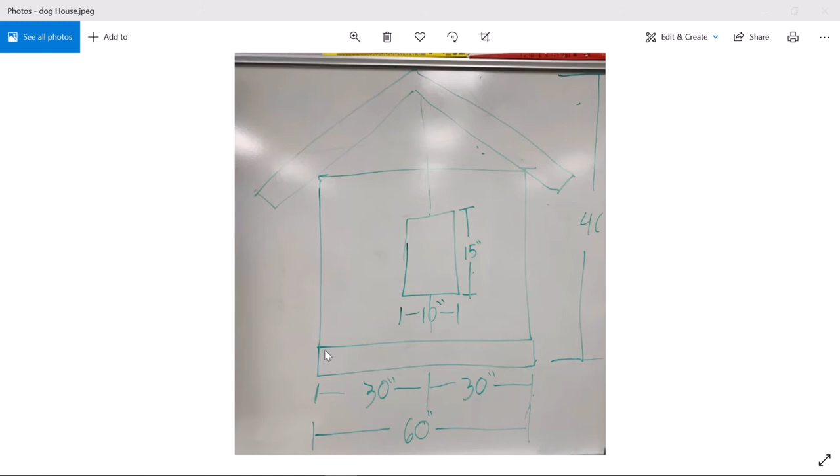It's time to make the floor for our doghouse. We're going to build from the bottom up, like you traditionally would. It's called platform framing - you build a platform, then build on top of that. In our floor system, we need a rim joist for our floor joist to attach into. Our floor joist attaches to the rim joist, and then our subfloor, the OSB sheeting, goes on top of that. So let's get started.

Okay, so the dimensions on our doghouse are 5 feet by 2 feet 6 inches, which is 30 inches. So we need to draw a rectangle. I'm going to hold in shift and pan a little bit, click in my scroll wheel or middle mouse button, and rotate till I get a look. I'm looking down right here.

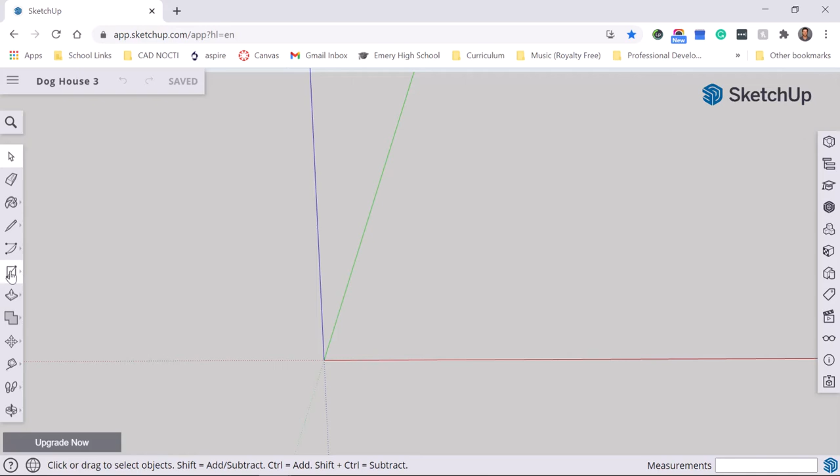Then I'm going to come to the left and choose my rectangle tool. I'm going to click on the origin and just click and let go. If you hold in your clicker, when you let go it's going to automatically make it that size - you don't want to do that. You want to click and let go like that, and then make it the right dimension.

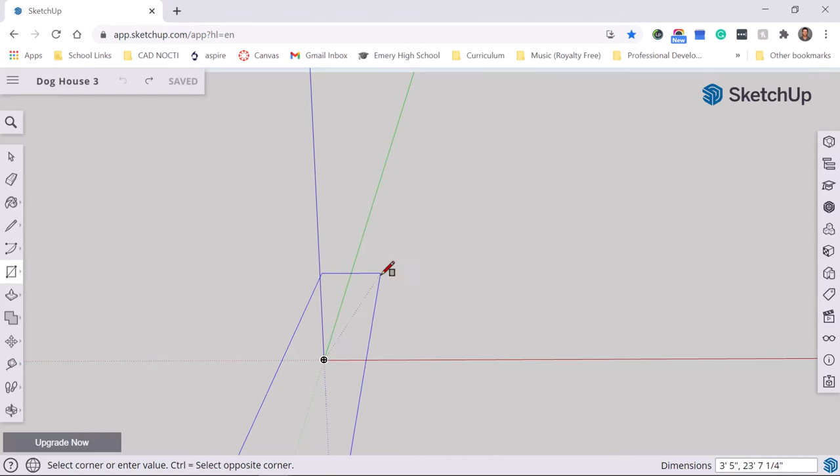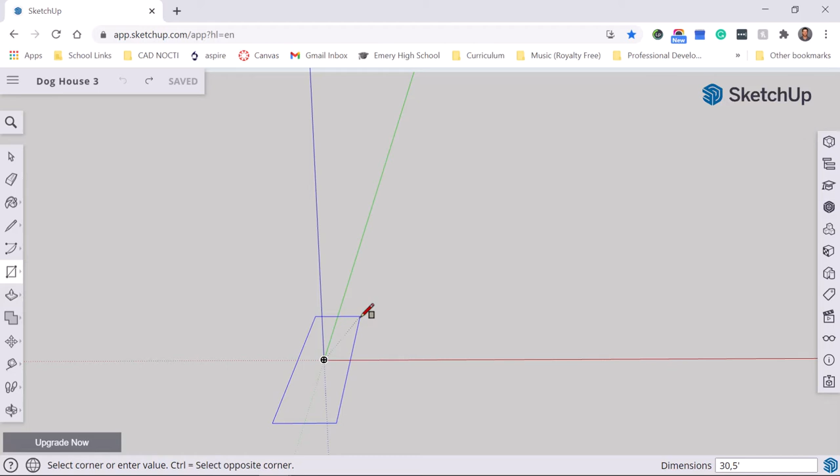So in the bottom right, if you look, it shows our dimension. Right now it's 2 feet by about 9 feet, and we want it to be 2 feet 6 inches, which is 30 inches. So if I type in 30, comma, 5 feet - you could do 5 and the foot symbol, which is just left of enter, or you could just do it in inches. I'm just going to do 5 feet. Enter. Now we have our 3 foot by 5 foot base that we're going to use later.

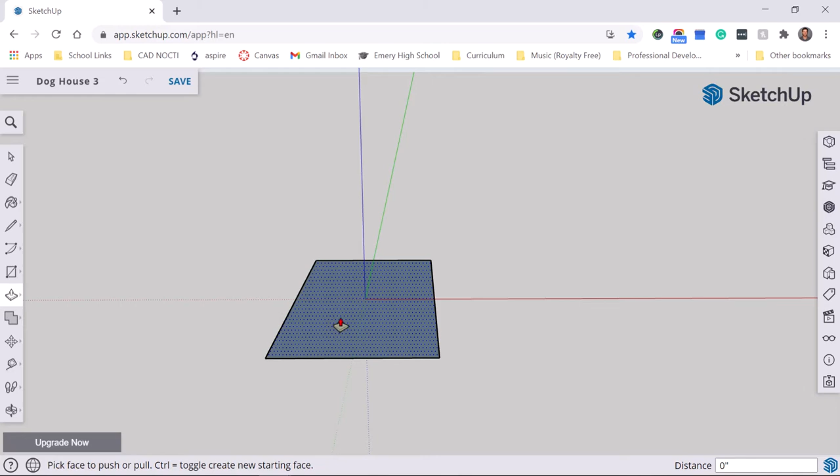So let's go ahead and extrude this. Use the push-pull tool, click and let go, drag up in the direction you want it to go. Our plywood is going to be 1/2 inch. Typically you'd do 3/4 inch tongue and groove for a floor, but since this is for a doghouse, we're just going to go 1/2 inch, so 0.5, or you could type in 1/2. Either of those would work.

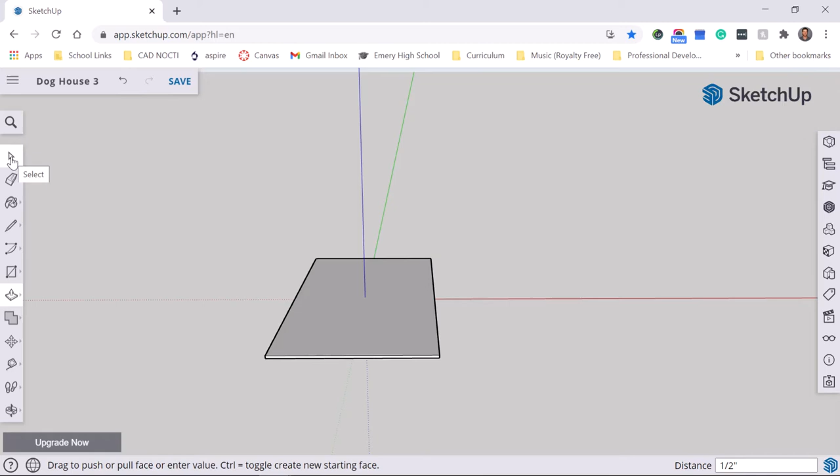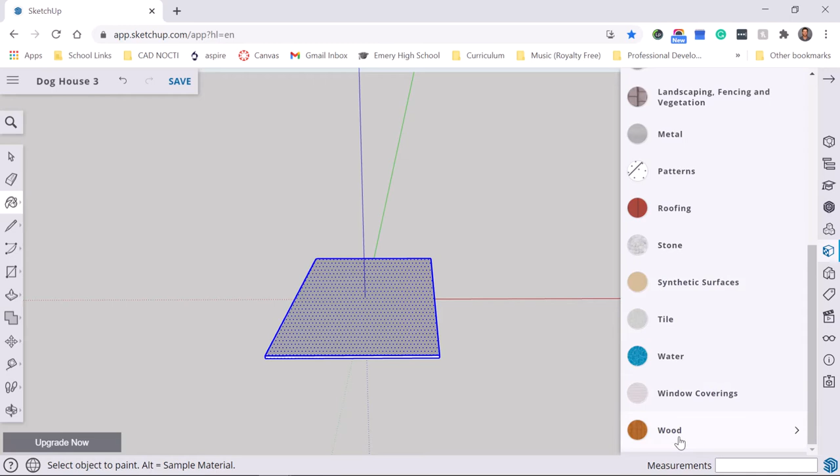So it looks good, but it doesn't look like wood or sheeting, so we need to fix that. Go up to the top left to your select tool, click and hold and drag a box so you select the entire thing, and then go to your paint bucket tool. On the right you're going to get some options. Click here on the browse - we want it to be wood, so it's alphabetical, go all the way down to wood. The bottom left is your OSB, oriented strand board. Click on that, paint it.

Okay, I'm going to go back to the select tool. I'm just going to click over here, hide this for a second, and click and drag a box over this. Now we need to make this a component - we need to combine all the entities in here. We need to combine the paint, our lines, our extrusion, everything into one solid board.

So I'm going to right click, say make a component, and we could just say OSB flooring - well, this is our subfloor, so OSB subfloor. And you could put the dimensions too, you could say it's a 3 foot by 5 foot OSB subfloor. Typically the more descriptive you are, the better, so that you don't go back and try to find it and forget what it was.

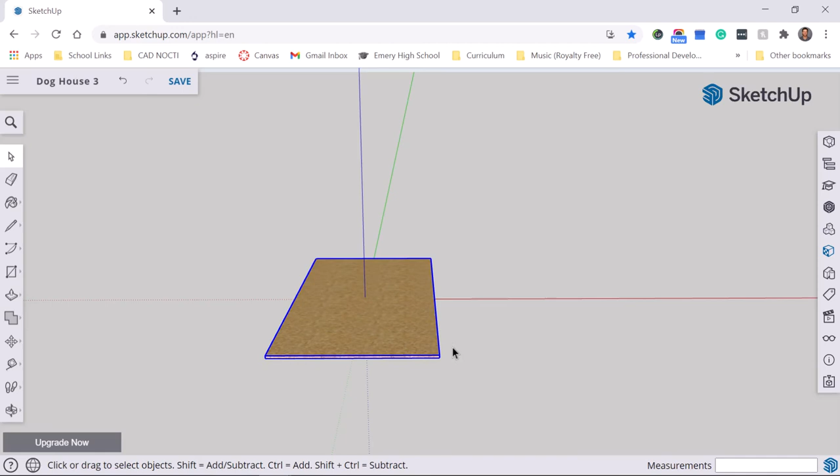Okay, there's our subfloor. You can move it by clicking on the move tool, kind of move it out of the way. Now we need to make our other components. So we made the subfloor, we need to make our rim joist and our floor joist.

So click on the rectangle tool, we're going to make a board. Click on the origin and go up the blue axis, and then kind of out to the right. I'm going to hold in shift, pan, and then rotate by clicking in the scroll wheel. I want to look down the board like this, making sure I'm going up the blue axis and then out this direction.

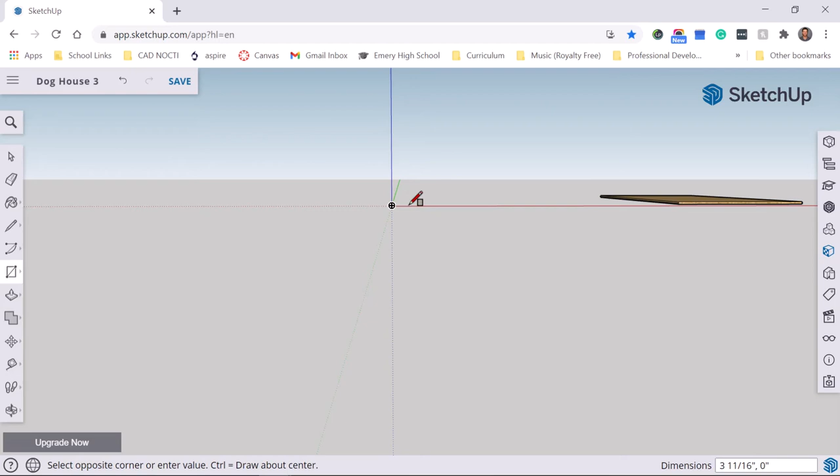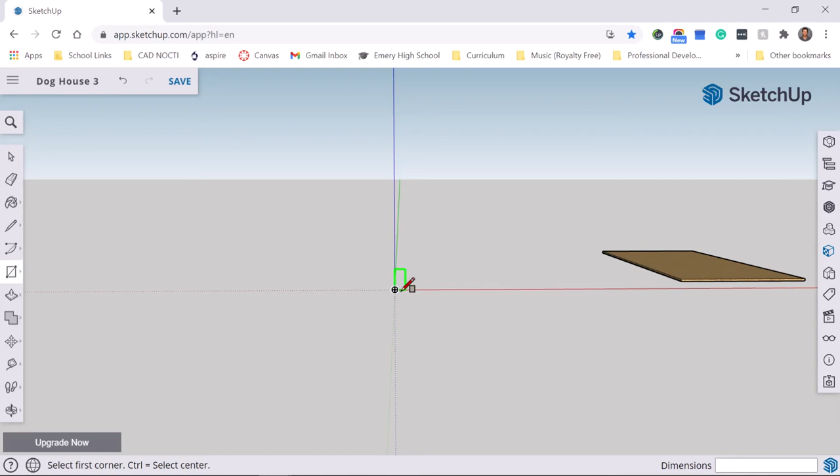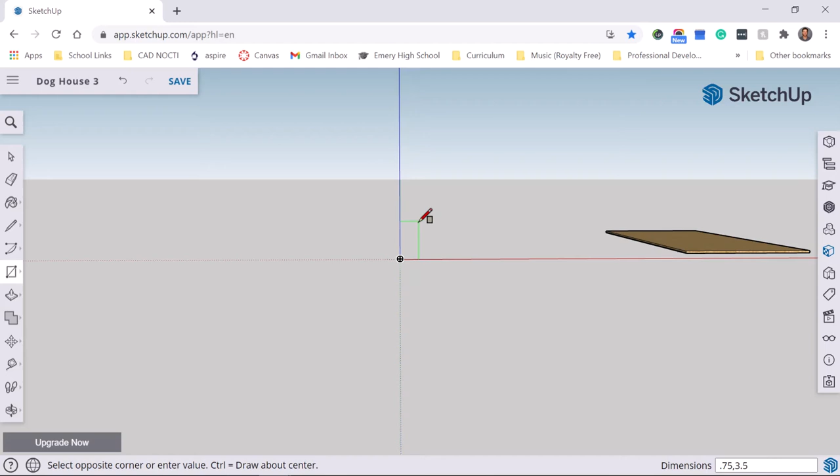Alright, so this board, we want it to be - well, actually let's do it this way. No, this way would be good. Okay, so look at it from this side. Click, go up the blue, out the red. And we want this board to be a 1x4. So a 1x4 is actually not a true 1x4 - it's 0.75, so 3/4 of an inch, comma, 3.5. Enter. That's what a 1x4 truly is.

Now we want to push-pull that. And this one is going to be 5 feet, so type 5, the foot symbol which is left of enter, and do enter.

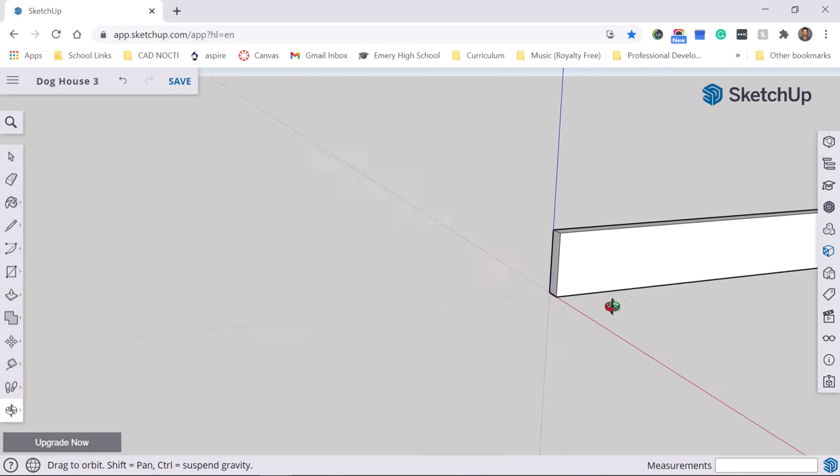Okay, I'm going to click on my scroll wheel and rotate. Now I'm going to select the whole board. Go to the paint bucket. So I clicked on the select tool, drag a box over it. Paint. This one we want to be a wood grain board.

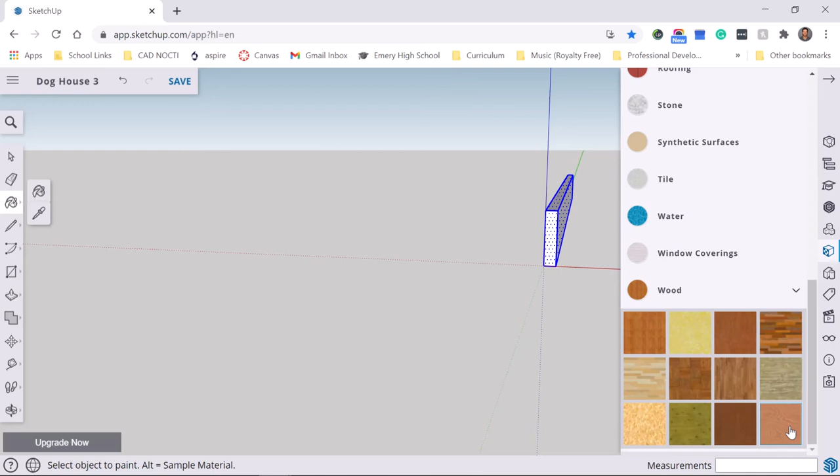They don't have pine on here, so we're just going to click on this one. It looks like a cherry. Close enough. Looks like a wood board.

Now you can right click on it, say make a component, and it's a 1x4 by 5 feet. And we could say this is our rim joist.

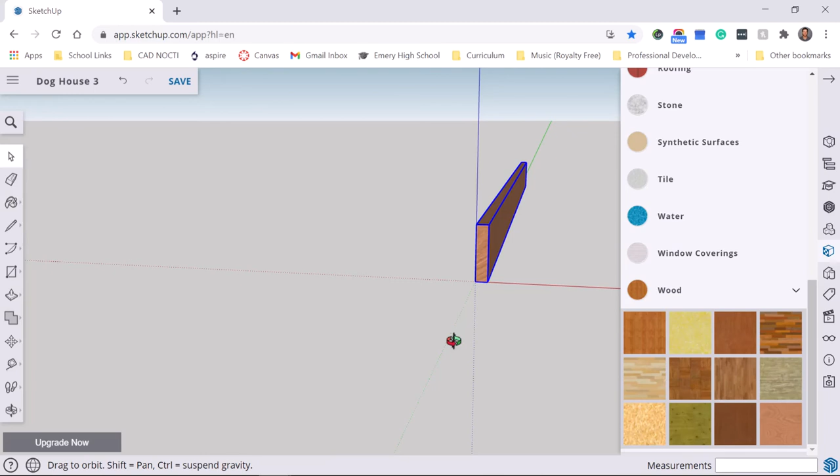The nice thing about this is after you've made one, you can just duplicate it. So I'm going to right click. There's a copy option up here. Right click on it again, and then there's a paste. And I don't know why this menu stays up, but you can move it out of the way.

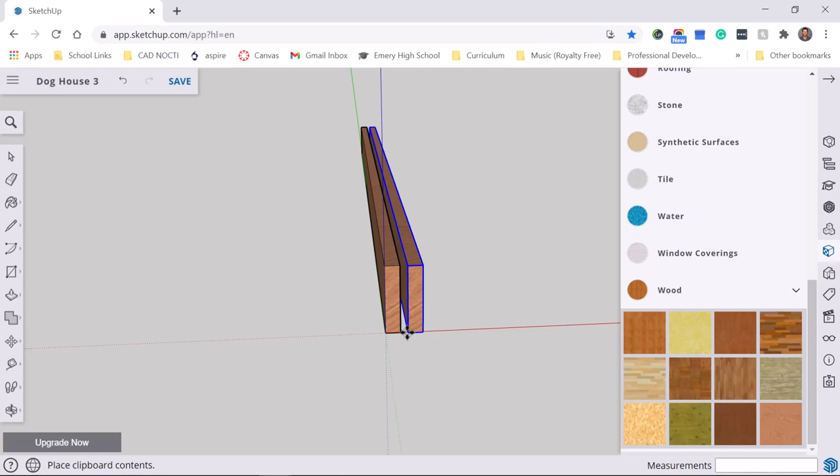Okay, I'm going to first click where I want it to start, right here. Well, I actually just pasted it there. So now if we want to, we can move it. So go to the move tool, click right here on the origin and move out.

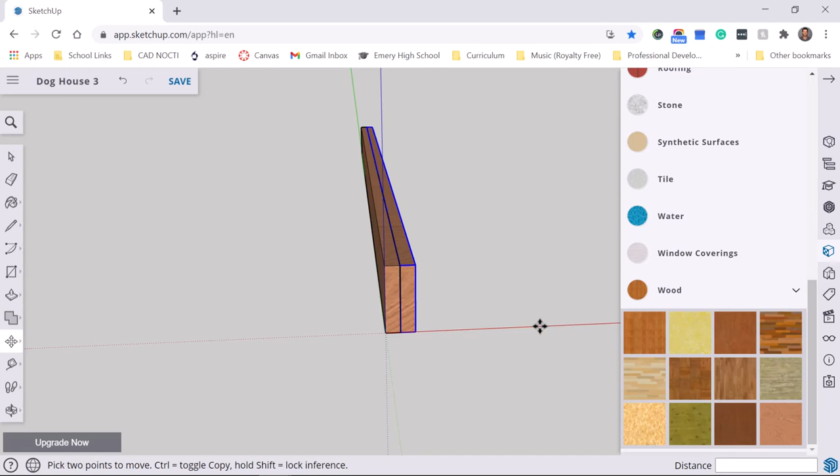And we want it to be 2 feet 6 inches from end to end. So actually, let's do something else. I just hit escape. Let's make us a little marker to shoot for.

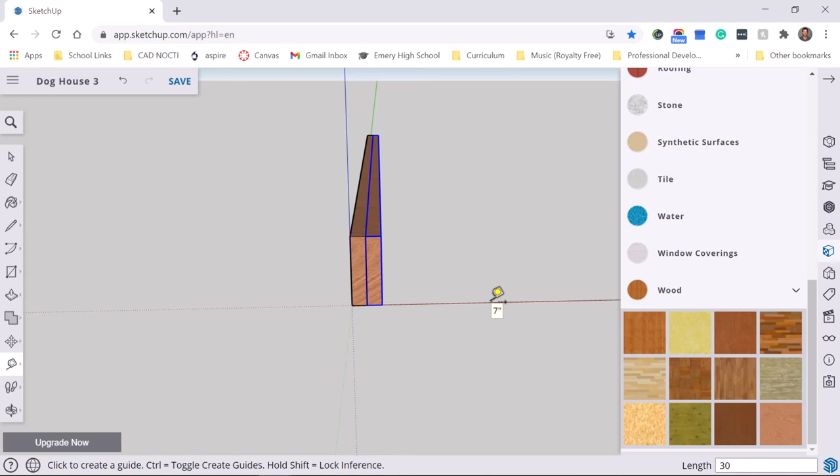So over here on the left, there's a tape measure. Click on the tape measure. Click on the left edge of this board and drag to the right and type 30. Enter. What that did is it gave us a little point out here of 30 inches because we want this to be 30 inches wide.

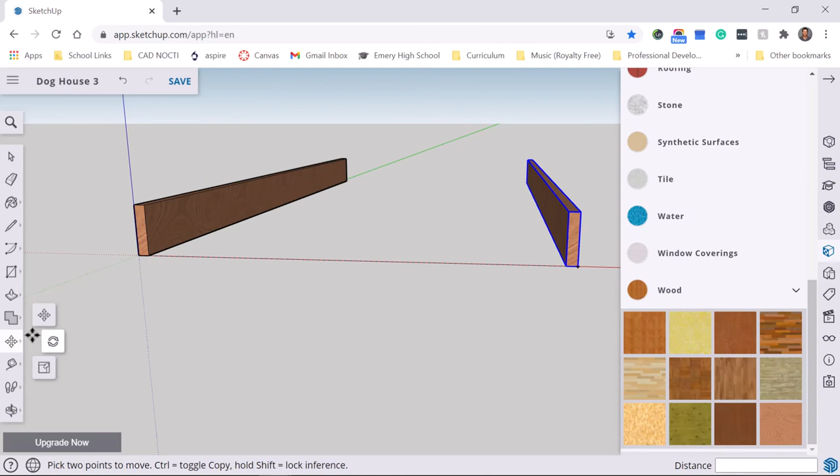So now what I can do is I can click on the move tool and I can click on the far right corner here. I can bring it over and I can actually snap it to that. So now if I were to measure this from outside or endpoint to endpoint is 2 feet 6 inches or 30 inches.

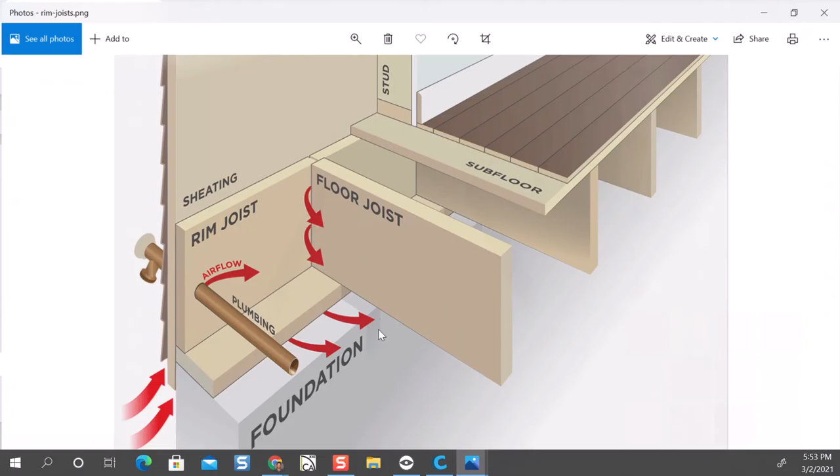Okay, so we're almost there. Now all we need to do is add in a couple more boards, which are going to be our floor joists. So we just made our rim joist. Now we just need to make our floor joist.

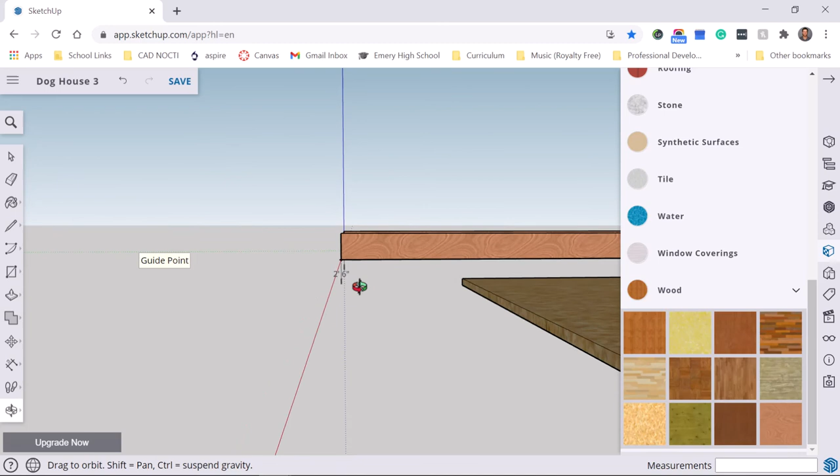So I like to draw them in the way they're going to extrude. So I want to extrude it out that way. So I'm going to look at it from this direction. I'm going to zoom in a little bit right here.

And then I'm going to do the rectangle tool. I'm going to hover over this endpoint. I'm going to go out to the right. And I'm going to click. That way I know it's lined up with that.

So once again, I'll do that again. If you hover over this and go to the left, you'll see a little green dotted line. That tells me that that is in line with that. So I'm going to click and let go and just drag up like that.

And this is a board that is 3.5, comma, 0.75.

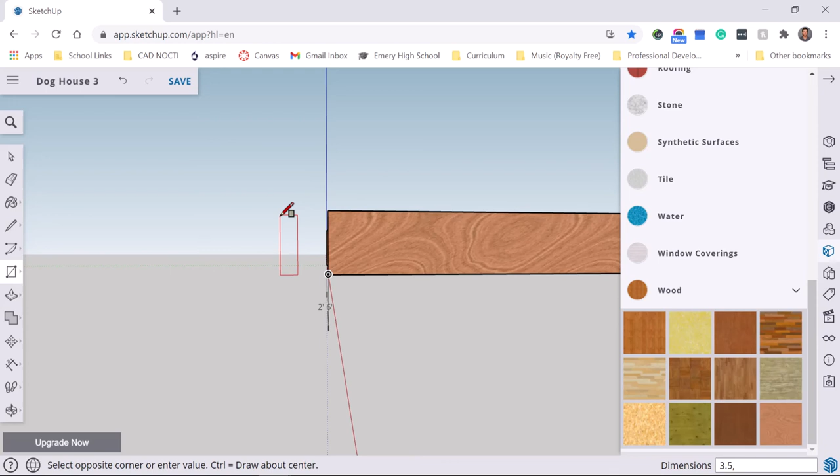And now I can extrude it in that direction. So to figure out the length that this board needs to be, we can either just take this measurement from inside to inside, or we can do some math. So you can do 30 inches minus 0.75 plus 0.75. So what's 3/4 plus 3/4?

Okay, so that's 1.5 inches. So you subtract 1.5 inches from 30, or you can click the dimension tool and click on the two insides and it will give you that measurement. So it's 2 feet 4.5 inches.

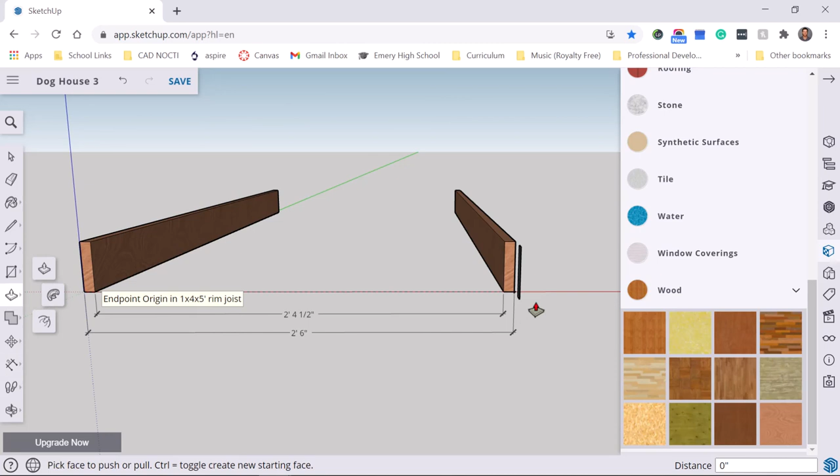So I'm going to go click on the extrude, select this face here, drag to the left, and I'm going to type in 2 feet 4.5, or you can do it in inches, which is 24, 25, 26, 27, 28.5 inches. So 28.5. Enter.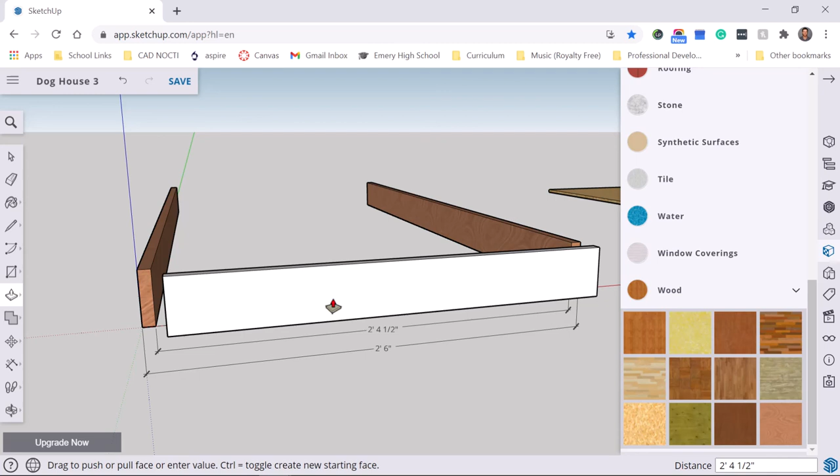Then I'm going to look at it from the side, clicking my scroll wheel and orbiting. Do the select tool. Make sure I drag a box and select everything there. And then I'm going to go ahead and paint it.

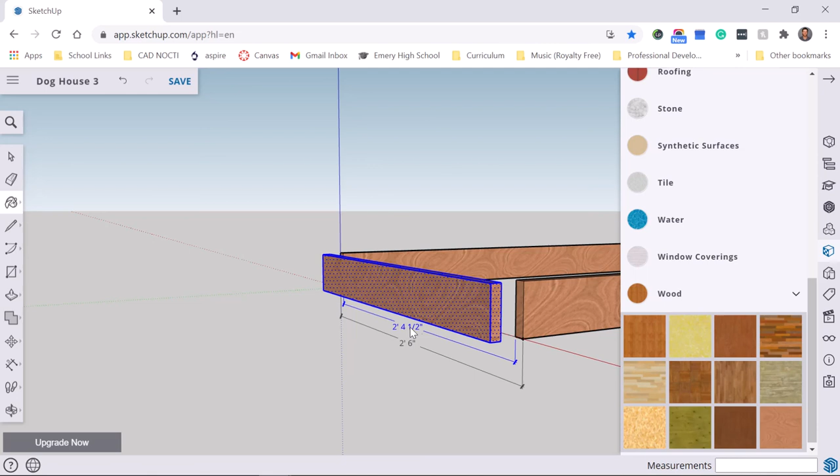I'm going to right click on it and make it a component. Actually, before I make it a component, I want to, it selected this dimension. So I'm going to go ahead and click off for a second and delete that dimension. It's kind of in my way. Then I'm going to select it again.

Going to right click, make a component. Just for time's sake, we're going to name this one floor joist. We won't do the dimensions on it.

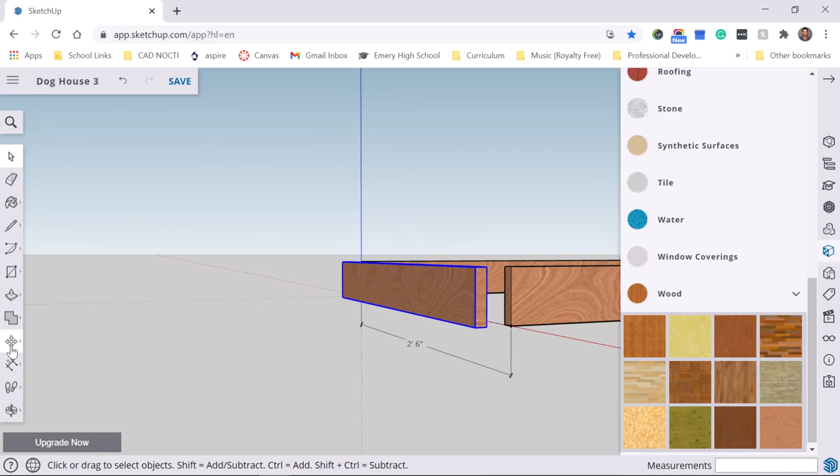And now I can put it in place by clicking the move tool. This one, it's going to be easiest to click on this outside corner and snap it to this inside corner. All right.

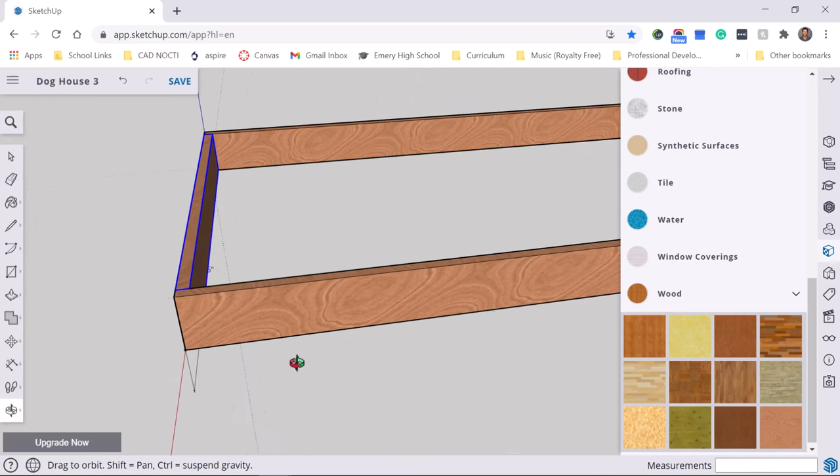So what we're going to do is we're going to pause here and go to the next video, and I'll show you how to do the rest of this.